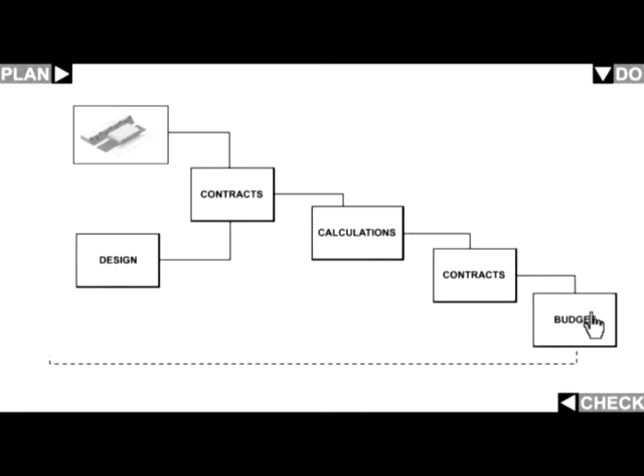The design is an integrated set of files that can conveniently fit on a tiny thumb drive, usable on any computer around the world. But managing the contents within the documents takes a lot of time, often managed by different people using incompatible systems.

Indeed, it's like an express train on metal cogwheels, unable to cross borders without a standard gauge rail system.

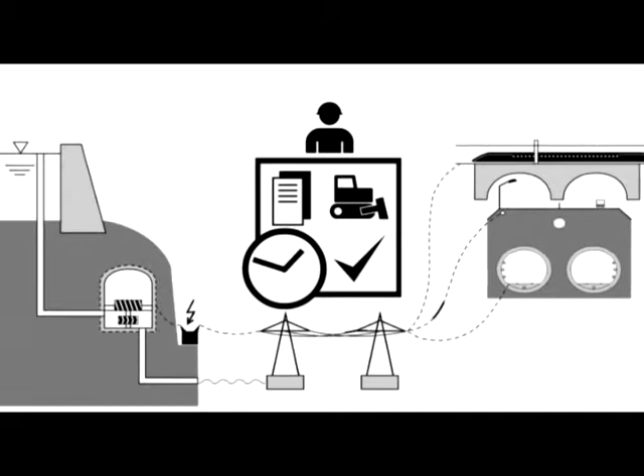Matrix bridges the generation gap between engineering and administration, to an area of construction where it was not properly utilized before. Matrix is an intelligent system that contains every aspect of construction, all in real time, conveniently standardized with a color protocol and adaptable to any civil engineering project type and location.

Imagine you need a progress report on an ongoing construction, and of course it's urgent. A mobile crane has broken down and is awaiting repairs, and you don't know how that broken machine will affect the whole project. With Matrix, this would only take a few clicks.

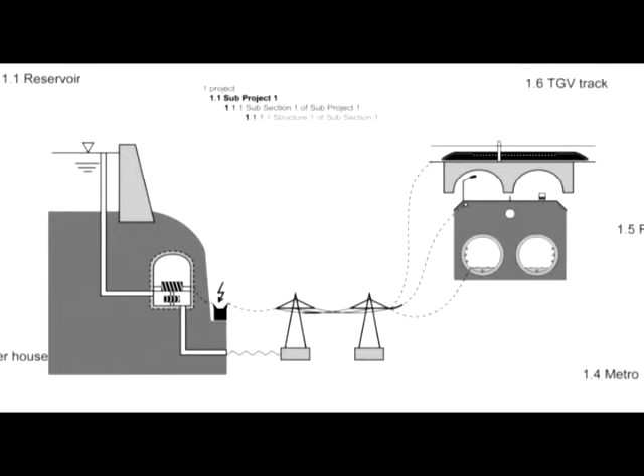It's a graphics-oriented database, which is an inherently strict system. Every bit of information in it will be categorized, interlinked, tagged, and readily available anytime.

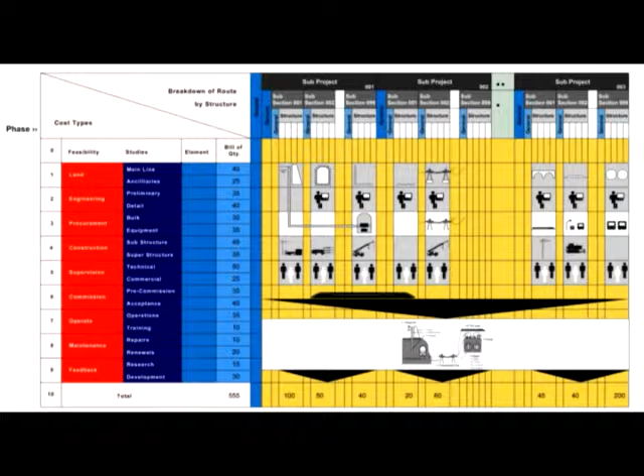And there's even more to it. It's computer-aided management with a built-in construction-specific multilingual dictionary and search engine.

Like the bricks in a building, a project is made up of individual blocks. In Matrix, each activity has an input, an output, and a time value, represented by the three visible sides of a cube. The construction of a train station includes excavation, ground support, concrete and so on.

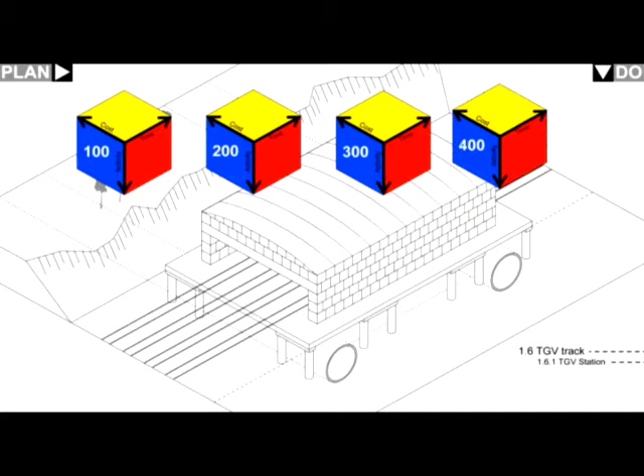If any of these are modified, suffering delays for example, the corresponding cube will reflect the changes instantly. And because it's part of a bigger cube, the whole project will be updated automatically. This eliminates nasty surprises. Matrix enables the manager to keep track of progress and produces an estimated result for every change of circumstances.

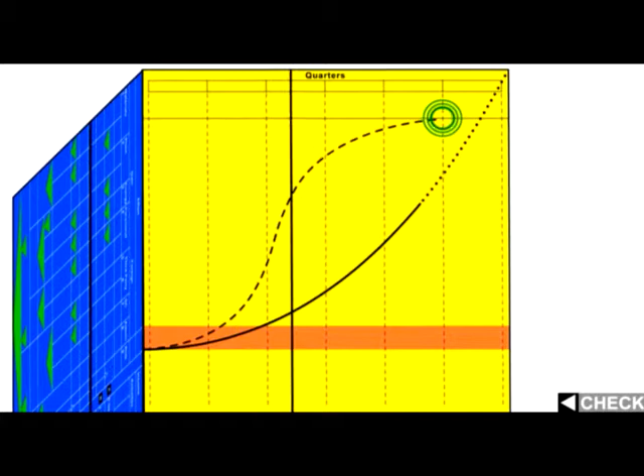Think of it as a virtual 3D environment. It enables different systems to talk to each other. Data can be kept in your favorite software, but updating needs a common link.

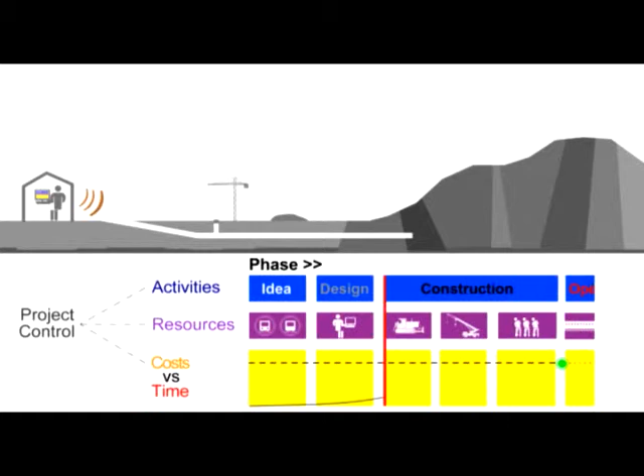Managing work beneath the surface is even more difficult and can be a manager's nightmare. He cannot visibly see progress on a regular basis. Access to the face is difficult and time-consuming.

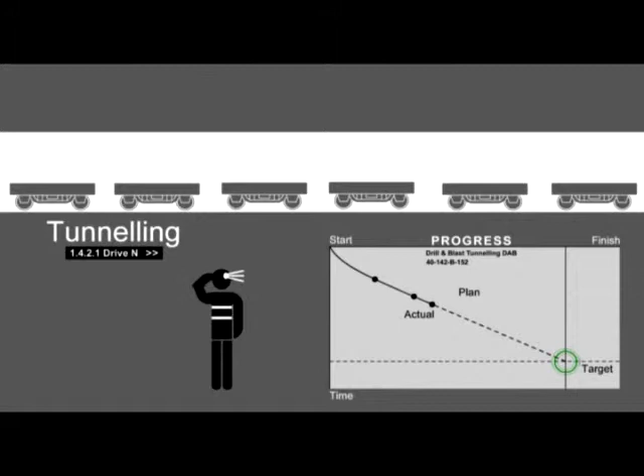Risks are high. If an excavator breaks down at the tunnel face, Matrix will immediately determine the delay and its effects on the construction as a whole.

If another machine is reassigned from another section of the project, for example road building, the system can recalculate various options to speed up tunneling while road construction is put on hold.

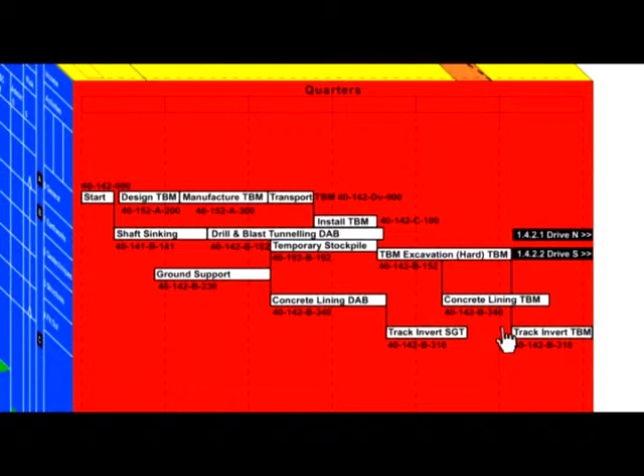The cubes that make up the project will resize, reflecting the changes in time and cost, showing how they affect the outcome of the overall project.

Matrix knows what different equipment can produce through logical links between activities, resources, and costs. It provides real-time irregularity reports and assists the manager to continuously re-estimate project performance. In other words, to see the complete picture in sections or as a whole.

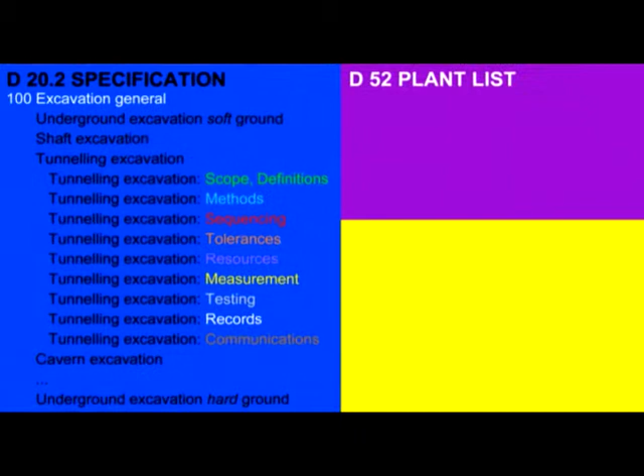Matrix introduces a data specification system using a consistent decimal structure that keeps everything identified at all times. Anything related to earthworks is tagged with a number starting with 100. If it has to do with tunneling, it will have a tag in the 140 range, and so on, down to the lowest level.

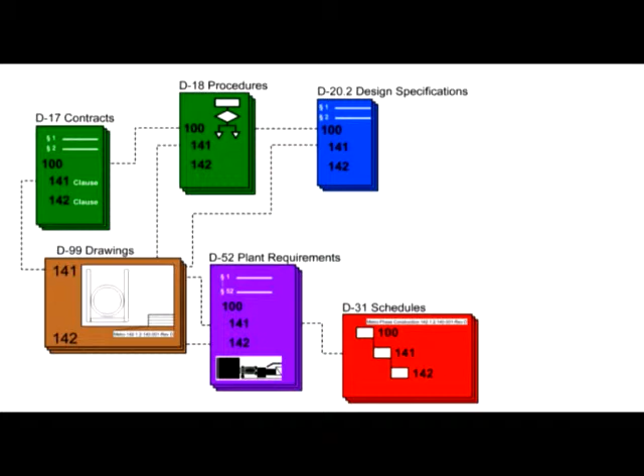This extends to conditions of contracts, procedures, phase design, and construction requirements, specifications, activity planning schedules, risk assessments, estimates, and reports, all having a standardized designation, just like in a barcode system.

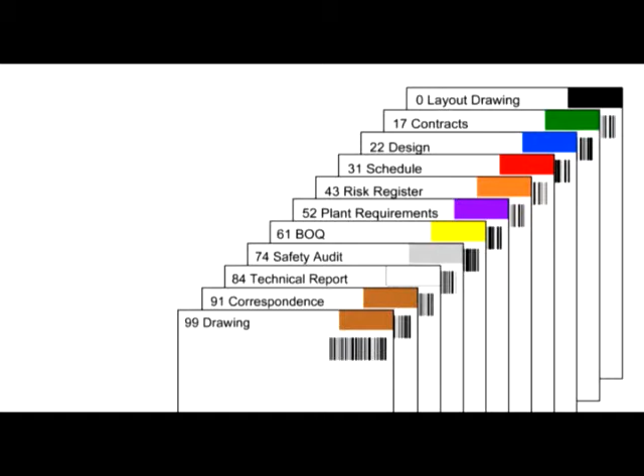It acts as a table of contents for the project, including and indexing every document, clause, and revision. This enables not only documents, but also the various aspects of document contents and responsibilities to be linked to tasks.

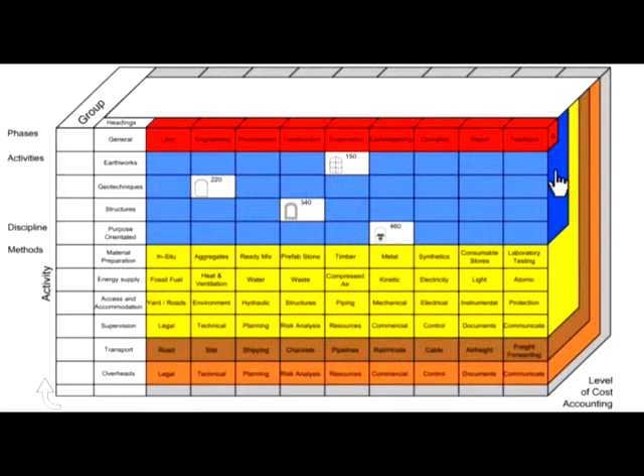This not only makes administration easier for people, it also makes it computer readable and compatible across different languages. Organizing information in a clear structure eliminates the need to manually search for keywords buried in scanned documents.

Large-scale constructions are often obscure for outsiders, and even for the decision-makers, who might be out of the picture and wondering where that huge sum of money is going.

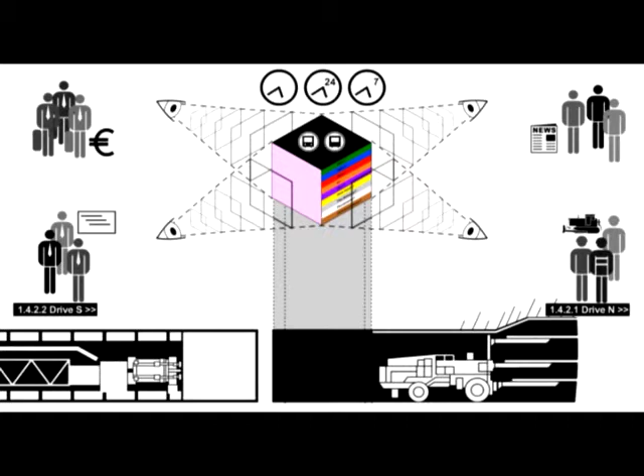The Matrix interface and the underlying database provides full transparency for supervisors at all levels. Managers, political leaders, even the press can get their report delivered hourly, daily or weekly, subject to various levels of confidentiality. Graphic presentation helps in underlining tendencies and puts everything into perspective.

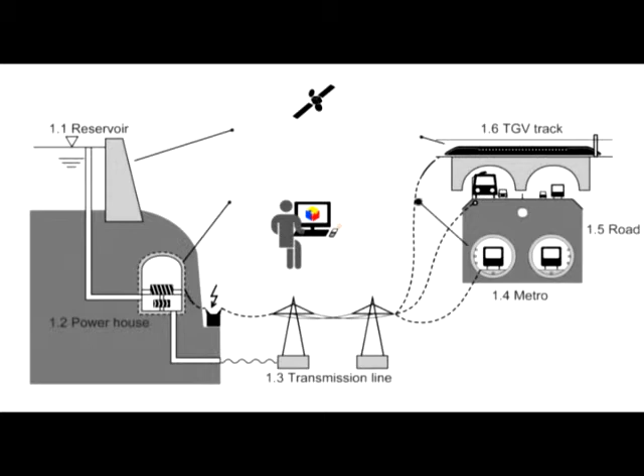Data collection can be automated to provide real-time updating of the information, taking the chore out of data collection and administration. The computer can sort and consolidate information faster and more precisely than people. The user decides which filters and the level of detail he requires.

No one would doubt that a bulldozer is more efficient in moving earth than men with spades. The same is true for the effort previously spent on paperwork, searching for information and calculations.

Decisions are still made by people. However, with an intelligent environment that simulates and predicts consequences, a system that lets modern machines, the computers, do what machines are good at, so people can concentrate on the evaluation of informed decisions based on the latest possible options and corresponding consequences.

As Matrix completes the computerization of construction, the slow cogs of administration will no longer get in the way.